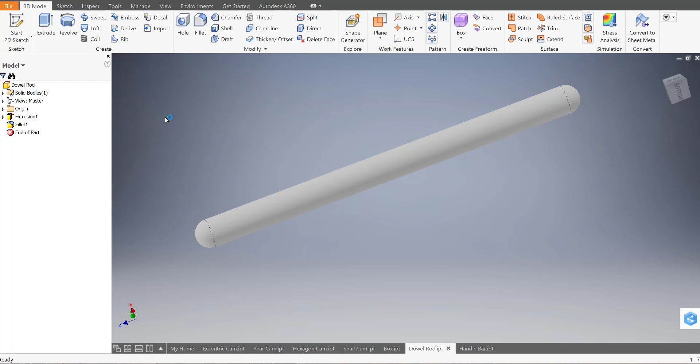Okay, so you have all the parts made. This would be roughly day 6, day 7, and we're going to assemble everything together. Let's go ahead, go File, New, and start a standard .iam assembly file. We've made all our parts, we've moved down to the assembly, and let's open up an assembly.

Now we're going to have to place in all the necessary components. My components might vary from yours, but go ahead and get all the important components by going to Place, and then finding the location of where everything is saved to. For mine, I'm going to need my box, my dowel rod, and I'm holding down Shift while I'm doing this. Let's get the eccentric cam, the hexagon cam, and the snail cam.

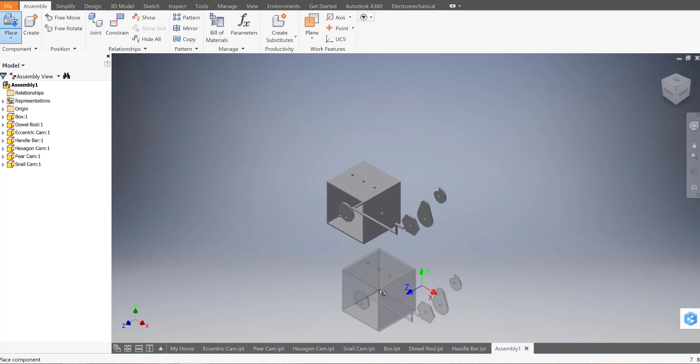Actually, let's just get it all. I'm just going to drop all these in here at once, although you can do it one at a time also if you like. I just do it this way because it's faster and I can move things.

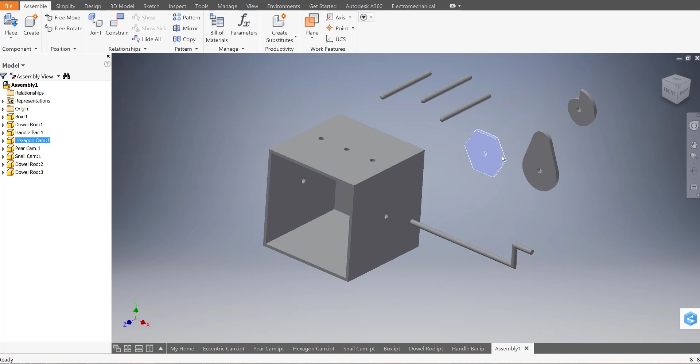Okay, so I'm going to need 3 of these dowel rods over here, so I could just copy them, right-click copy, right-click paste, and do that a couple times to generate 3 of these. Let's go ahead and scrap one of these cams. I feel like the eccentric cam would be the easiest to work with, so I'm going to scrap that so we can focus on the more difficult ones. But if you want to use the eccentric cam, go for it. It will work just the same.

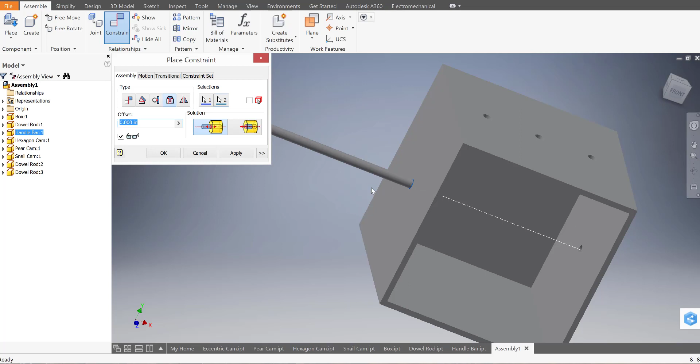Okay, let's put the handlebar in first. I'm going to go to Constrain, to my Insert Constraint, and connect the end of the handle to the end of the box. You hear that click, it was pretty loud. It's the wrong way, but that's fine. I'll just flip the direction by clicking on the aligned option here. If it was the right way for you, you don't need to click on that option. Okay, but now the handle's in place, so I'm going to hit apply.

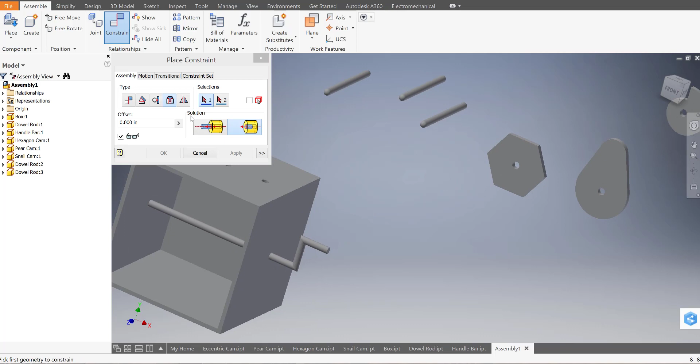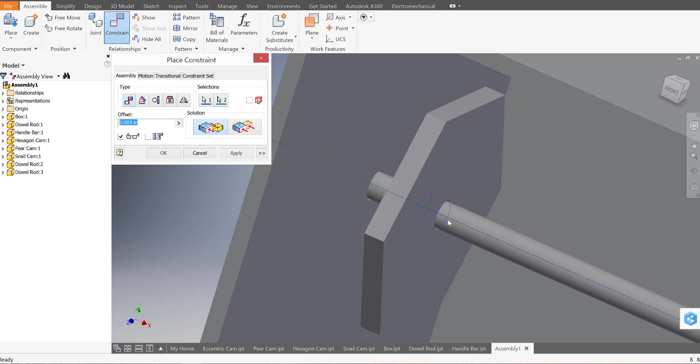Let's go ahead and add the next part, which will be the hexagon cam. I'm going to switch back to mate, and go to the center—you know it's the center when you see that line. This is the center of the hexagon cam. I'm going to mate that over to the center of this dowel rod, and you know it's the center because you can see that line. Now heads up, there's going to be a loud sound. Okay, I'm going to press apply, and then let's do the same with the pear cam.

Find that center. There it is. I'm going to put it roughly in the center of here. Hit apply. Then go to the snail cam, find that center, and put it in the center of the dowel rod. Okay, press apply.

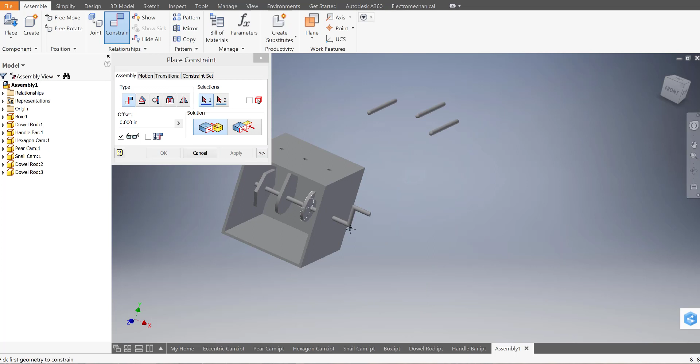Okay, we're going to do the same with these dowels here. I'm going to find the center of the dowel—you see that line cutting through? I'm going to run it through the line here. Apply. That one, to this one. Apply. There, to here. Apply.

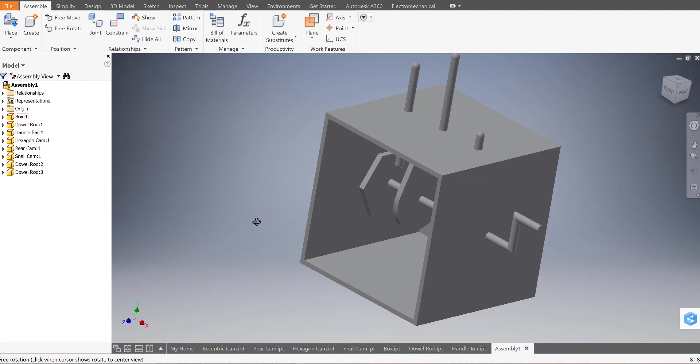Okay, so everything's kind of loosely in place, but nothing's exactly permanent at the moment. So I could still move these up and down. The handle can kind of crank, and these still slide on it. So we still got to fix a few additional things to them.

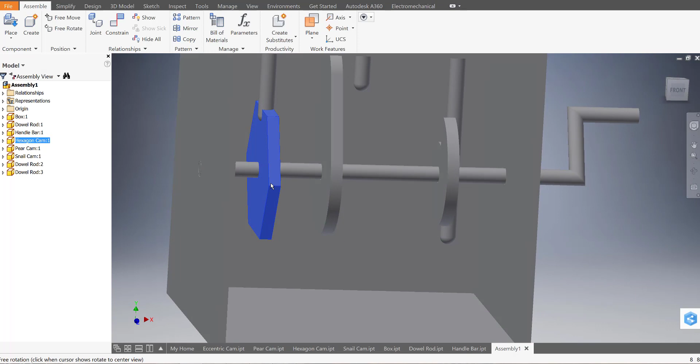One of the things we need to do is turn on the planes that divide these in half so we can control them better. Let's say right now I have the hexagon cam selected—you can tell because it's blue. I'm going to open up its selection options here, then go to the origin folder, and turn on the YZ plane because that one's cutting it in half, like you can see.

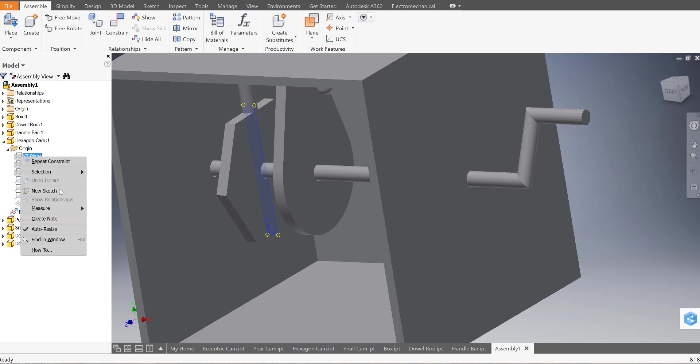So I'm going to right click and turn on the visibility. Did they rename it or something? It's weird, let me select that again. Okay. Maybe they updated it in a recent version. Who knows, but that's fine.

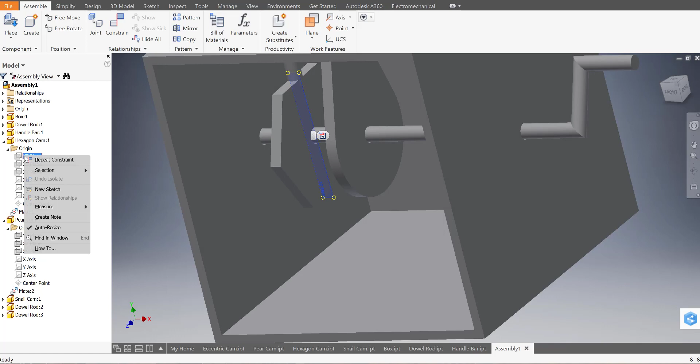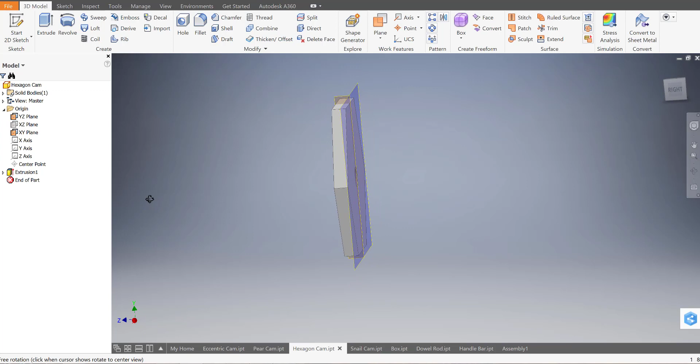There's other ways you can get that plane to turn on. What I'm trying to do right now is turn on that plane, and there's usually a visibility option. But I'm going to double click on the part, and it'll take me back to the original. Then on the original, I could probably find the plane here and turn on its visibility. So that one cuts that in half. And I would need the one that cuts it in half the other way. But as you can see, that doesn't really cut it in half the way I want it. I need it in the center. So I'm going to turn that one off.

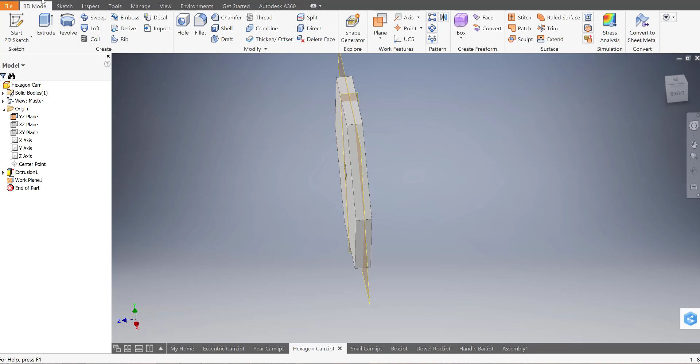Then I'm going to use the plane tool up here. If I select one side—whoops—and then rotate it to the other side and click the other side, it will average those and put a plane in the center like that. Okay, and then I could just hit the save button. When I close out of this, it auto updates on my assembly.

So I'm just going to jump into the pear cam now and do the same thing. Turn on the plane that cuts it in half this way, then use the plane tool to turn on the other one and cut that in half. Okay, save it.

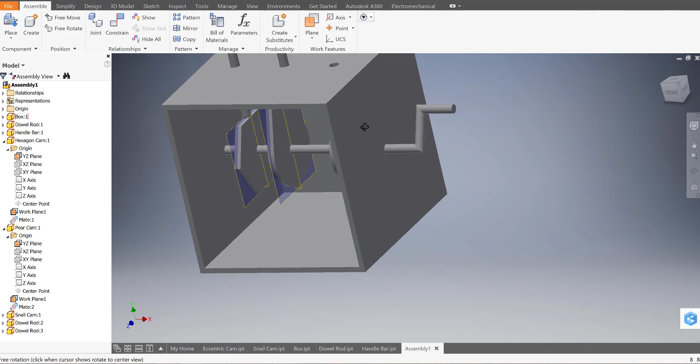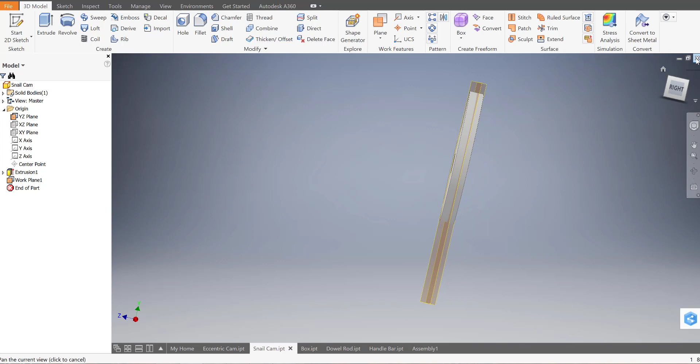And then we'll do the same with the snail cam. Open up the origin folder, turn this one on—yeah, that one's the best one for cutting it in half. Then use the plane tool and rotate it to get that other plane on. Save it, close that, and we'll need one for the handle as well.

Okay, and the one for the handle just has to be the one that cuts it in half. So it's the XY—in my case, it's the one that cuts it in half this way. Okay, and I'll turn that one on and save that and close that.

Okay, so all our planes that are necessary are on and everything's looking good. So that's going to conclude this video, and I'll see you in day 7 where we add the animations to this.